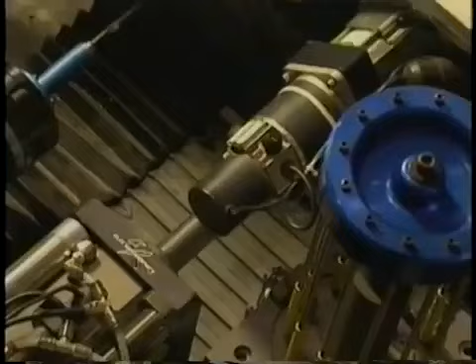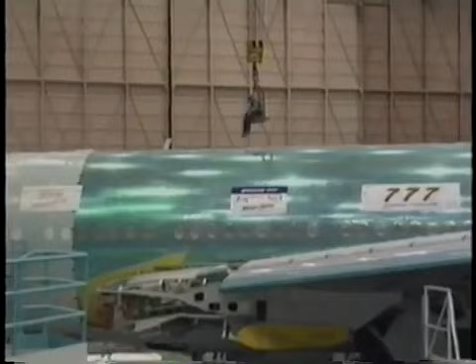It would be one of the most complex machines ever built. It would take 10,000 people and nearly 5 years to build it. It would cost an estimated $5 billion.

Success was anything but certain. The plane would contain more than 4 million parts supplied by contractors around the world. But would they arrive on time? Miss your first commitment and then things start to go wrong. And would they work? From a technical point of view, I would not put this back on the airplane if I had a choice.

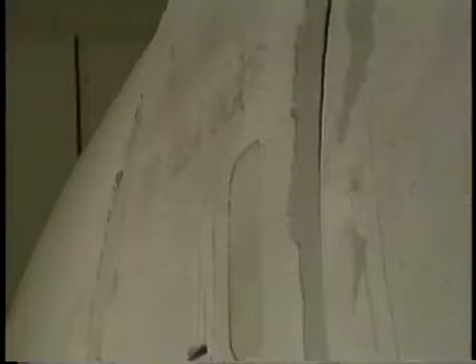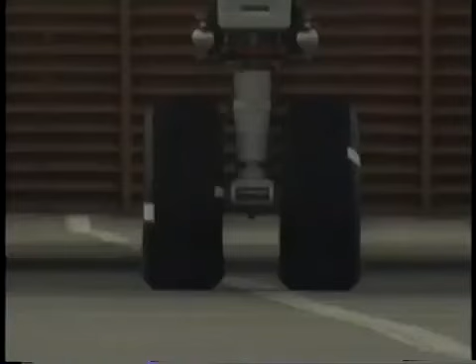This plane would be built to set a new standard for commercial aviation. This is the story of the building of a 21st century jet.

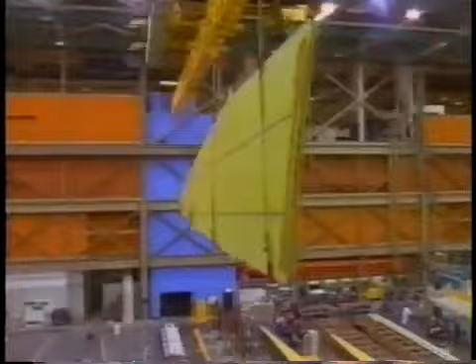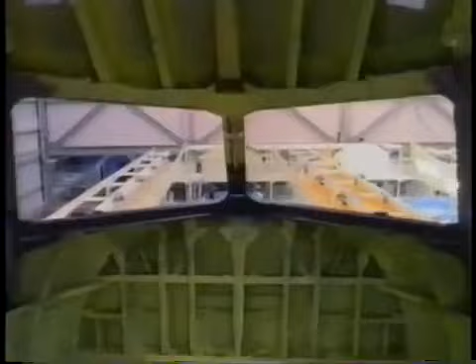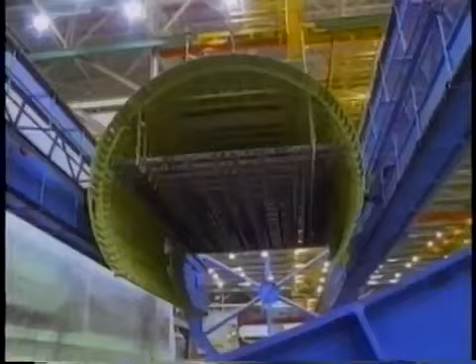For the last 3 years, we've been following the process of designing, manufacturing, and testing the world's largest and newest twin-engine airliner. It's cost an estimated $5 billion. Boeing needs to sell 200 or so planes at roughly $100 million apiece before the company will consider the plane a success.

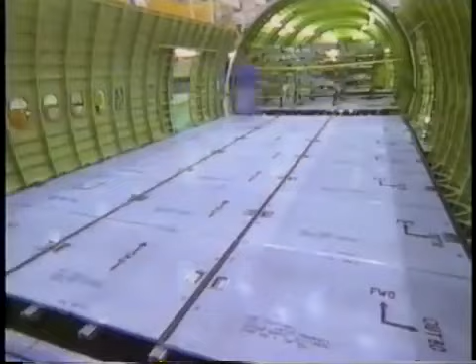Back in mid-1992, Boeing began assembling and training the 10,000-strong team whose excitement and disappointments would punctuate the complex process of plane making. A key figure in this drama was Alan Mulally, the 777 director of engineering. He had a boyish charisma, a fierce pride in his company, and he was determined that the new plane would succeed - the best airplane company in the world.

But in the time since Boeing had developed its last airliner, the aviation industry had changed. It had become harder to hold on to a share of the market. What's different with the airlines? They have choices. They haven't had so many choices before. All except the 747, Airbus has an airplane that can match every one of the Boeing airplanes. So they have choices for the first time in history.

This new competition had come about because of a gap that opened up in the commercial aviation market. The airlines wanted a long-range plane that was smaller than Boeing's 747, so Boeing's two rivals started manufacturing new planes to fill that gap - Airbus with its A330 and 340, and McDonnell Douglas with the MD-11 and 12. The 777 comes somewhere between a 767, a 200-seater, and a 747, which can carry up to 425 passengers. When the company first decided to enter the race, they hoped they could expand the 767 in ways that would satisfy their customers.

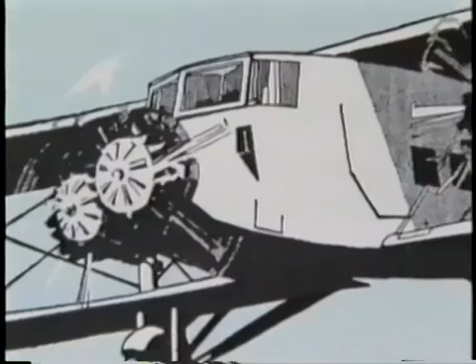To justify the huge investment in the new plane, Boeing needed a launch customer, an airline that would commit to buying a significant number of the new planes in advance.

They naturally turned to United Airlines. The two companies had been partners in the early days of commercial aviation. This is United's first Boeing airplane, the earliest all-metal transcontinental passenger airliner. The company has since bought more than 1,000 Boeing airplanes.

But the historical relationship between the two companies counted for little when it came time to make the deal. Gordon McKinzie of United: So we went through a rather large evaluation process in 1989 and 1990, where we were looking at 33 combinations of airplanes and engines for our wide-body purchase. And this was just one of the candidates.

The 777 was up against the Airbus and the McDonnell Douglas airplanes. The sales campaign came to a head on the weekend of October 13th, 1990, when all 3 manufacturers, Boeing, Airbus, and McDonnell Douglas, were summoned to United headquarters in Chicago to make their pitches.

Boeing was asked to sign this handwritten piece of paper. It played a crucial role in the decision, as Alan Mulally would later tell the 777 team.

There's a piece of paper that Jim Guyette, Executive Vice President of United Airlines, wrote at 2:15 in the morning. He woke up in a cold sweat. He's going to walk in and see Mr. Wolf, the chairman of the board of United. He had the chief financial officer who was voting for Airbus instead of Boeing, and he had to walk in and make his vote: what airplane should United Airlines go with for the next 30 years?

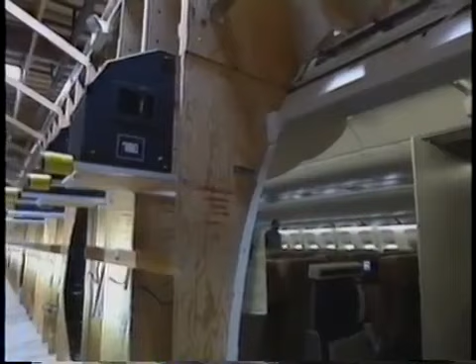But it was the interior of the plane that most interested the customer. To show off the interior layout, Boeing spent hundreds of thousands of dollars on a life-sized mock-up. It would be an essential sales tool. Early on, Lord King, chairman of British Airways, was given a guided tour.

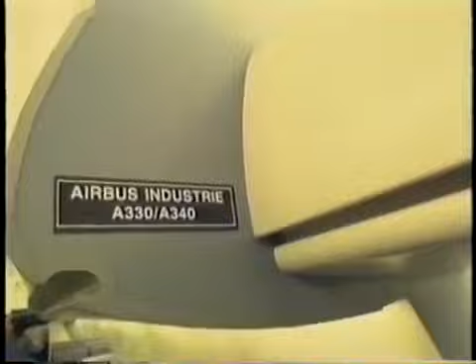Lord King is shown an important area at the back of the mock-up, called by salesmen the dirty pool, with an emphasis on how the 777 would compare with the competition. So all the wide bodies flying today, because what we were after was, you said make it bigger and make it roomier. Well, this is what people are used to flying. Here's the contour, and here's the bins. Here's the 777, the 5 inches larger. You can see the contour, and then the effect of the bin. Okay, all right, let's look at the back.

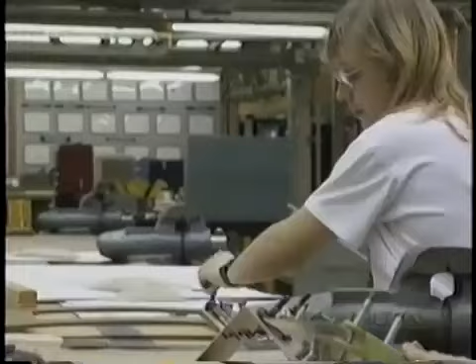In previous Boeing planes, full-scale mock-ups of the aircraft, inside and out, were not just marketing tools. They performed an important role in the design process. With the 747, for example, Boeing built several life-size mock-ups of the whole plane, with every part modeled in detail before the design was finalized. It was the only way the engineers could see whether or not the pieces fit together.

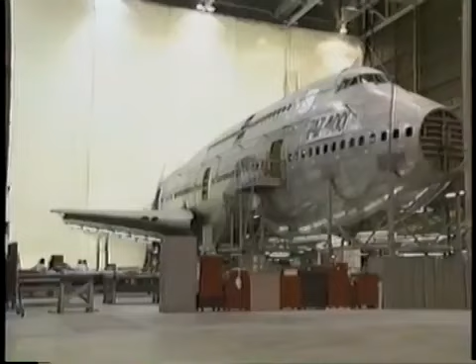Because of the three-dimensional complexity of the plane, a component as first designed often got in the way of the structure or one of the other parts, like these red pipes, which are not meant to go through the yellow duct. With the 777, Boeing wanted to find ways to catch these interferences, as they're called, before the assembly stage.

You have 5,000 engineers designing the airplane. It's very difficult for those engineers to coordinate with 2-dimensional pieces of paper. For a designer who's designing an air conditioning duct to walk over to somebody designing structure and say, here's my duct, how does it match up with your structure? And they've got 2-dimensional pictures, very difficult. So we ended up using the mock-up and, quite honestly, the final assembly line to finish up the integration. And it's very costly. You end up with an airplane that's very difficult to build. It all has to do with visualizing 3 dimensions on a 2-dimensional drawing board.

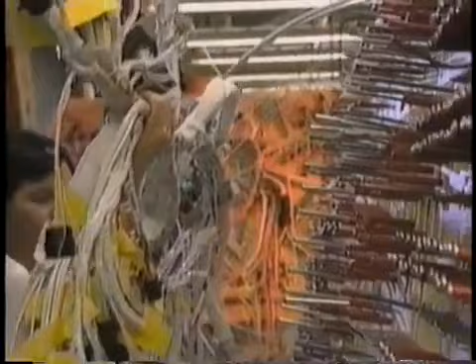One of the trickiest problems was working out the lengths and angles of tubes, pipes, and wires. We would literally, physically thread the systems through that mock-up, and then, in the wire bundle sense, take it out of the mock-up, flatten it on the board, measure it, and that's how we decided how long the wire needed to be. Then you would adjust as necessary, because the airplane, not made of plywood and aluminum, differs from the mock-up. So as you produce those first wire bundles, you make further adjustments to make them fit the real airplane. Hydraulic tube, a very similar situation.

The solution was a secret weapon called CATIA, a computerized design system that would require 8 mainframe computers to run it. Engineers would be able to roam the virtual interior of a plane that didn't yet exist.

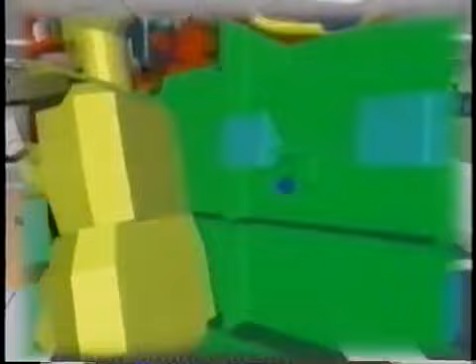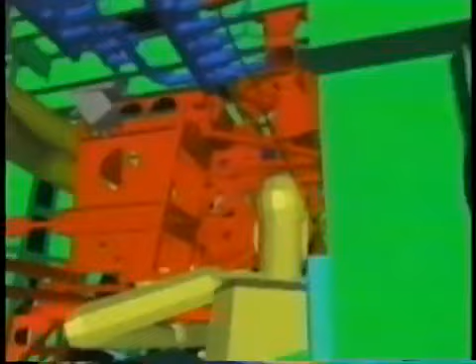As pieces were designed, they appeared in the virtual airplane next to other components, and the team could check to see that they all fit together before they were carved out of metal. So for the first time, the engineering creative process was enabled to think in terms of the way the world is, in terms of 3 dimensions.

Now, computers don't design airplanes. We have not put the knowledge that's in the airplane designer's head into artificial intelligence that balances all these objectives. Someday we'll probably continue to move toward that, but right now, the knowledge to design airplanes is in the designer's head. There would be more than 2,000 computer terminals so that each group of designers could feed their drawings into the main computers.

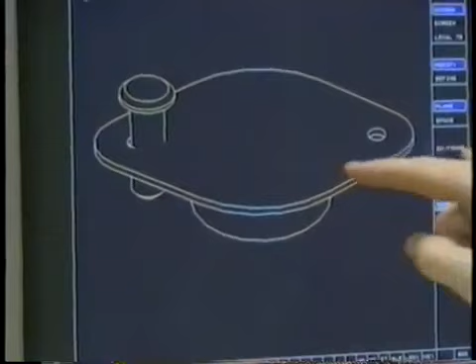In June 1992, the passenger doors team was checking for interferences in the components they had designed. An interference showed up in red. The designer was concerned about two crucial components in the door hinge.

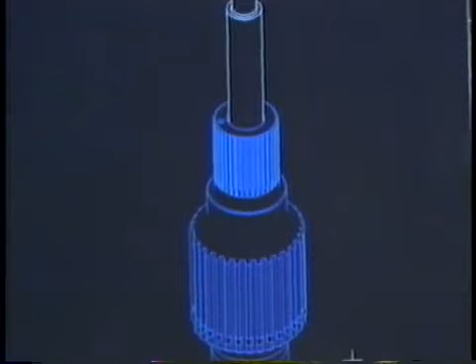This splined part right here, there's a bolt passing through it. It's actually the connection of the door to the door frame, the cutout. And this bolt affects that connection. Somewhere inside there we've broken some law.

Now that looks like a real interference. This is what happens when you accommodate your stress man's desire that they be intimate.

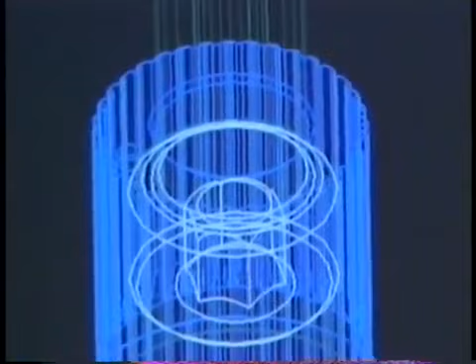Ah, they interfere for the entire head of that bolt. But the actual amount it interferes, we can really tell by cutting through the two of them and looking at an accurate cut, which doesn't take hardly any time at all.

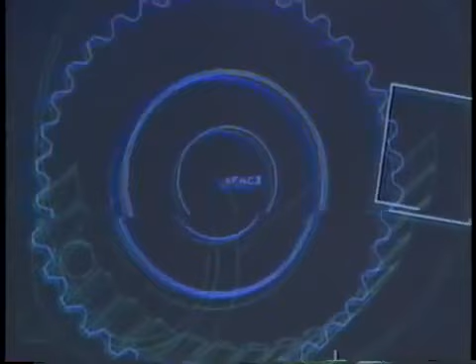Now this, yes, the second circle is just a little bit larger than the first circle, and I do indeed have a little problem here. But it's a very small one. We haven't released any drawings yet.

Another innovation on the 777 would be a new method of organizing the 10,000 or so people building the plane. On past projects, airplane design had been bedeviled by communication problems between the many different divisions in the company. For the 777, Boeing would create new work groups called Design Build Teams, or DBTs.

They would include people who had never before worked together. I wish I could say that design build teams were one of those wonderful ideas that just leapt forward, where you said, aha. In a lot of ways, it is a return to some things that have worked in the past.

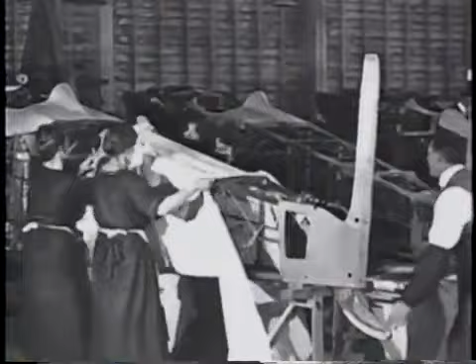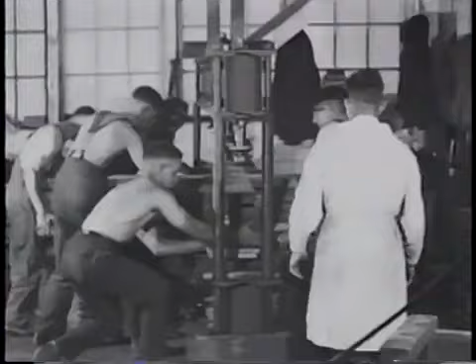That were scale driven. If you go back to the early airplanes that Boeing built, the factory was on the bottom floor, engineering was on the upper floor. Both manufacturing and engineering went back and forth. When there was a problem in the factory, the engineer went down and looked at it and said, well, you better do this. The entire design department was within 50 feet of each other.

As the scale went up, that got harder and harder and harder. And if you're not careful, organizations, just by the way they behave, want to form little enclaves. So structures goes off over here, and air conditioning goes off over there, manufacturing goes over here, and planning goes over there, and finance goes over there.

And then one day you turn around and you've discovered there's an us and them attitude. If only they would do this, then our job would be easier, and if only they would do that.

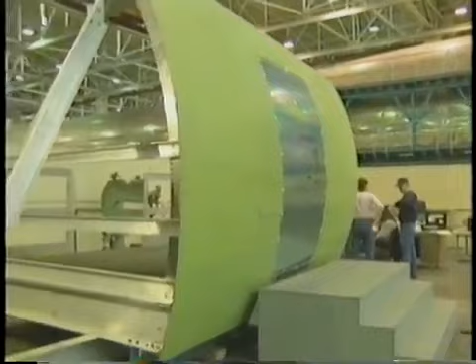The passenger doors were designed by one of over 200 design build teams, each responsible for a major component. Making an airplane door that works involves the complex interaction of geometry, materials, manufacturing, and in-service maintenance.

At one point, this team faced a problem that brought up all these factors. That's a full-size drawing of the two cutouts in the door skin that are located very closely together. Again, our principal concern is making sure that with all of the parts that have to be integrated into this area, and the fasteners that have to be put in the skin, do we have enough room to do all of that, and will the assembly be durable and damage tolerant?

The problem involved a metal area of the door skin between the window and the door handle cutout that was uncomfortably narrow. The designers had two questions: how strong a force would produce a crack in this area, and if the metal did crack, what force could enlarge it and lead to the door failing?

They get two different figures from the stress analysis engineers. It would take a force of 27,000 pounds per square inch to crack the metal. But once a crack had formed, a force of 12,000 pounds would be enough to open it up.

That's the way we perceive the situation. 12 is the upper limit at which the crack will not grow. And in this area, there's not much room for a crack to grow. We're very tight. I guess the problem, what's still not clear in my mind is, for the identical area under the identical consideration, are you getting a recommendation of 12 from one guy and 27 from another?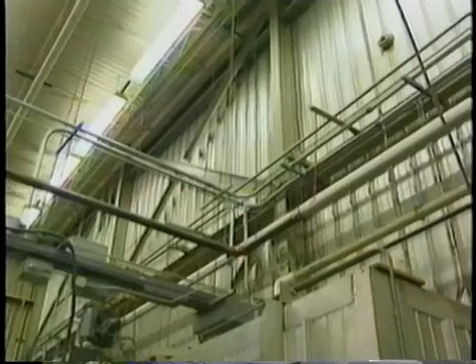In mid-1992, while the team was still designing the door, they built a prototype for a very important cold weather safety test. The engineers wanted to see if the door could be opened in the worst imaginable conditions of icing on the outside of the fuselage.

The first stage of the test involved spraying the door with water all night in a low-temperature chamber until there was a thick layer of ice.

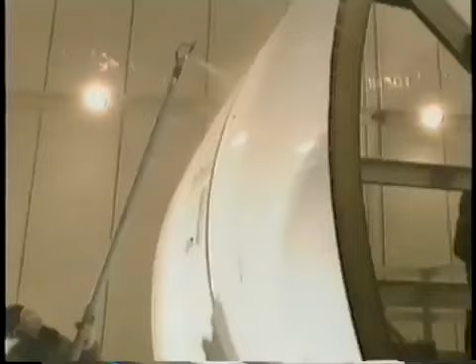But how could a plane ever get into such a state? If a plane lands from a cold flight, minus 65, and comes into an airport where it's about 28 degrees with freezing rain, that rain adheres to the outside of the airplane. We need to make sure that we can open the doors. Our criteria is a quarter inch thick of ice all over the whole airplane, and yet someone with nominal handle force on the inside can still open the door.

We consider the ice to be as strong as 100 pounds per square inch to break it. It's a quarter inch thick, with about 200 or so inches of ice around there. So factoring all that in with safety factors, it's about 6,000 pounds of lift that has to be put on the door to break all the ice, and that has to be put in with about 50 pounds of handle force on the inside. Set up as quick as we can.

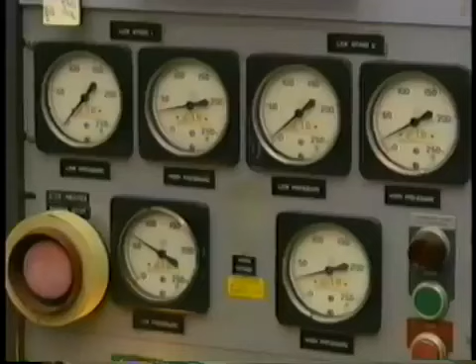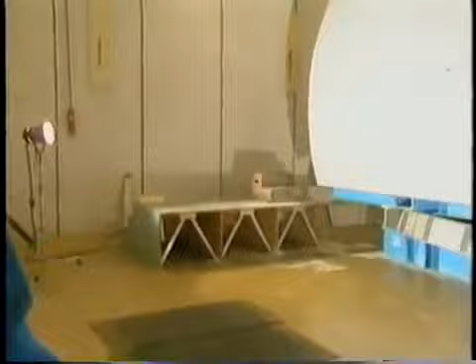The following morning, the door had acquired a thick enough layer of ice to test the mechanism. It's minus 20 in there right now. It was minus 55 in there yesterday when we sprayed the water to make sure it iced up. Considerably colder yesterday. Minus 20 is not so bad.

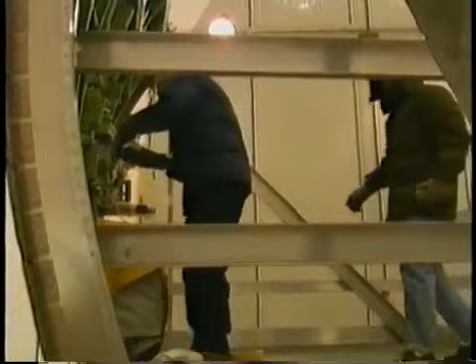This test had never been done before on this door design. If it didn't work, the engineers would have to redesign the complicated opening mechanism inside the door.

Now this is, the girth bar was right against here? Right, this is all fabric. That's great, it'll show up automatically. Boy, it's nice. This is a big key test, and it worked great. Feel real good about it. Right.

Another part of the plane that was being tested long before the 777 existed was the flight control system. Boeing equipped one of its smaller planes, this 757, with a prototype of a brand new system that would be used in the 777. They had to test it in flight. Right now I'm holding a lot of column force. These tests came after many months of testing in simulators on the ground. The new system was called fly-by-wire. I'll go to 10,000 feet and about 250 knots, and we'll stop there and do some evaluation.

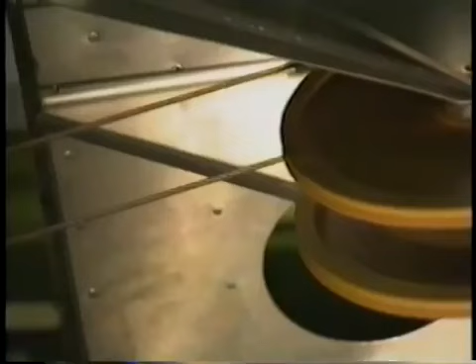Boeing's chief test pilot for the 777 was John Cashman. He would be the first to fly the plane once it was built. He quickly understood the advance that fly-by-wire represented over the more cumbersome system then in use. An airplane, particularly a large airplane, has large cables that run from the cockpit controls to the actuators that move the surfaces, and almost all big airplanes are hydraulically moving the controls. Those large cable runs are very difficult to rig and very time-consuming to maintain.

So from a maintenance side, it's a fairly big improvement in terms of time to maintain. The changes and improvements you can add to an airplane are much more easily done if it's a computer card change versus a mechanical redesign. There's a pilot's joke about fly-by-wire systems that says modern planes could be flown by a pilot and a dog - the dog to bite the pilot if he touches the controls, and the pilot to feed the dog.

In fact, the computer systems that would be installed in the 777 were so intelligent that engineers believed they could make decisions as good as those made by the pilot. But Boeing stopped short of letting computers fly the plane. It was a question of safety. The biggest disadvantage from a safety point of view is the potential that you haven't thought clearly through all of the events that may occur and taken enough precaution. There's an apprehension anytime you change technology, particularly when you switch from mechanical, which is visible, to electrical, which is not. So to some extent, we've taken a conservative approach to make the airplane fly like a conventional airplane from a pilot's point of view.

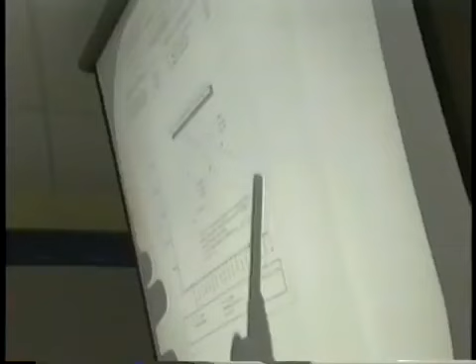New terminology came thick and fast at this stage of the project—too fast for some members of the team.

We do that, MCs are okay. Requirements for SDS items and APL, Raj, next week. I forgot what an SDS item is. It's a shop distribution standard. Okay.

We'll also show you the PRR process. With delivery schedules becoming critical, tempers began to flare when one engineer felt he was being delayed by another.

I've taken a lot of flack over that. Item 8 was the wrong one to put in. The thing we agreed to put in is when structures returns to the data set. No, my man told me. No, we all agreed—we all agreed, even showed him the chart. I showed you the chart. But I showed you that's useless data; most of it is obsolete.

Because it's not useless data. I'm missing releases because you did not transfer on the date the agreed to information. Because you didn't transfer to me. What baloney, anyways, that's the wrong date. No, it's not, I did it. I sat there for 5 minutes 2 weeks ago and explained it. I showed you an example. Everybody jumped on, why are you talking to me? I agree. You guys agreed? Yeah, it's done.

It's done. In spite of mounting pressures, there was the occasional good news. One of the team reported on a foreign airline whose government was deciding on the purchase of 6 777s. The 777 had been up against its main competitor, the Airbus A330. And the cabinet had approved the 6. And then they said, well, we think that may not be right, and what we think is we probably ought to add 2 more. So instead of approving 6, they approved 8. And then they also did not approve the 7 A330s that they were asked to approve. All right, nothing like winning.

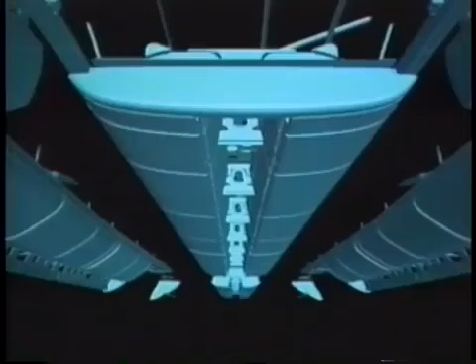Boeing was also proud of its new overhead bins, which seemed to demand a technology and a jargon all their own. We have 3 sizes of bins, and those bins can be shuffled to any arrangement to snug up to outboard monuments. We call them monuments, labs, closets, galleys, etc. But more importantly, in the past, each one of those monuments was very static and had to be tied straight back to structure. In this design, this fore and aft member allows that unit to be translated fore and aft in the cabin on 1-inch centers anywhere in the airplane in prescribed flex zones that allow load path capability in the overhead rail.

The Japanese were expected to be one of the largest purchasers of the 777, but would be among the shortest in stature. Nichols finds a diplomatic way to refer to this fact in describing the design process.

This is an issue with our customers, more so with our Pacific Rim customers than for instance European customers or the American carriers. It's the height, it's the ergonomics of the latch, and some of them feel that it's a bit too high. Now, on a pivot bin, it must be this high to reach the latch, but once it opens, then the access to the bin is more than acceptable and more than appropriate in terms of a shelf bin. Where the shelf bin remains static, you hit a latch that's quite low, and the door swings up, and now I'm reaching up here to grab the door. So the latch handle, though our customers have expressed some concern, they've all been through the mock-up, and they understand our design, and to physically move that would demand a lot of effort, and believe me, we can do anything, but we've pounded our stake in the ground and believe ergonomically and demographically this is the right latch.

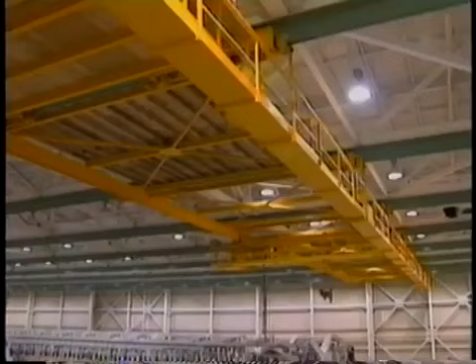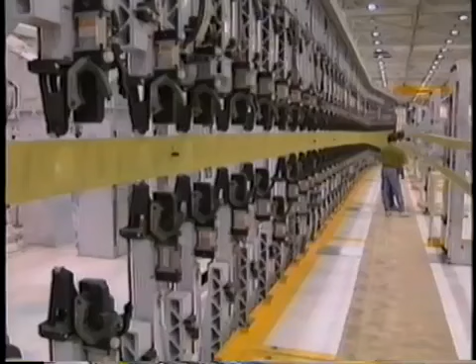The first year's work on the 777 involved designing the new plane. Now manufacturing would get underway. It would begin as the first component of Boeing's brand new aircraft, a wing spar, began assembly on a giant automated riveting tool. This piece was a long, thin metal spar that would run the full length of the wing. Over the next few months, the rest of the wing would be built up around it.

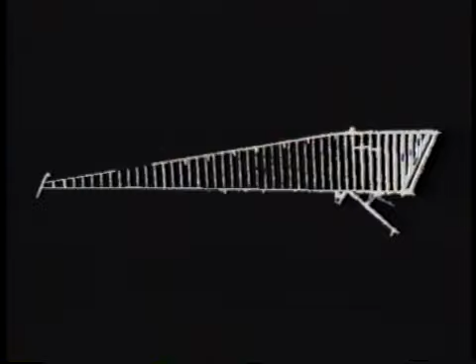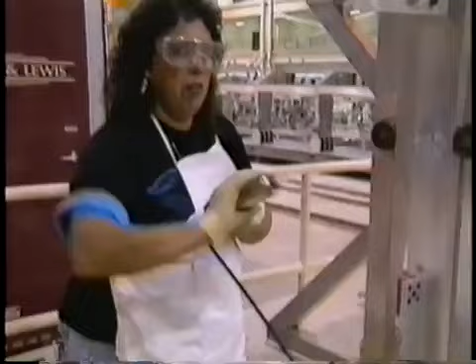Sylvia Lefferer had the informal honor of initiating the process as she began her job of sealing the edges of the 100-foot-long piece before it was fastened to other components. It was a simple process involving an injection gun and compressed air.

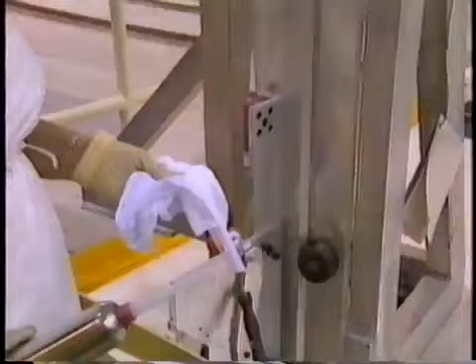Something's wrong. At least it was supposed to be. We got a problem, we got no air right now, so we got to try to get that hooked back up. Well, it did for a minute. Maybe it just bled out.

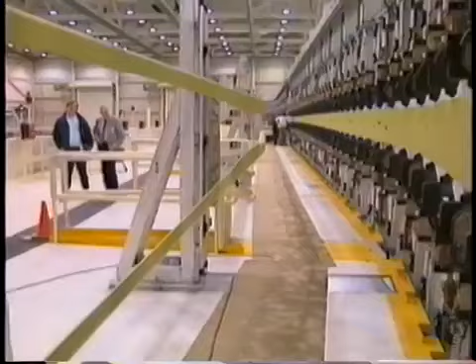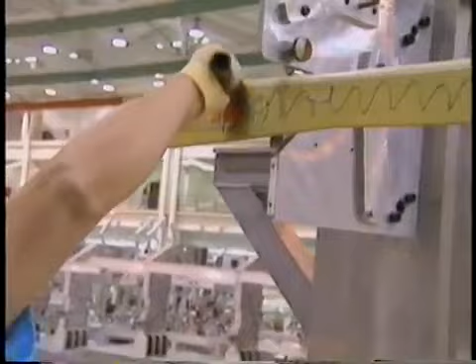Once the air started flowing, she smeared a layer of gray sealant along the piece. After years of doing this on other planes, she could produce a layer of constant thickness the entire length of the piece.

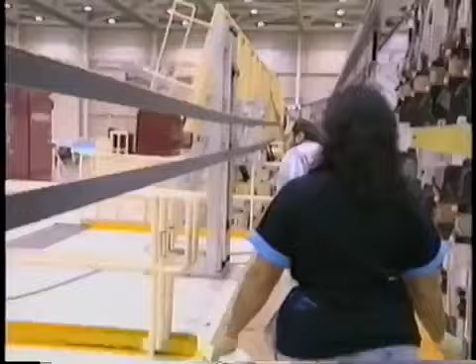The work had to be checked by a quality control inspector. Too thick a layer would add weight to the plane. Too thin and it wouldn't seal properly or prevent corrosion. Looks good. Thank you.

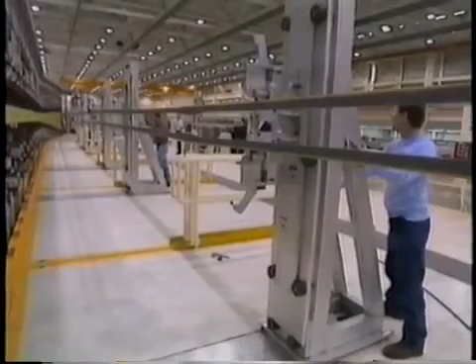Sylvia's work passed inspection and the pieces were moved into contact with another component ready for fastening.

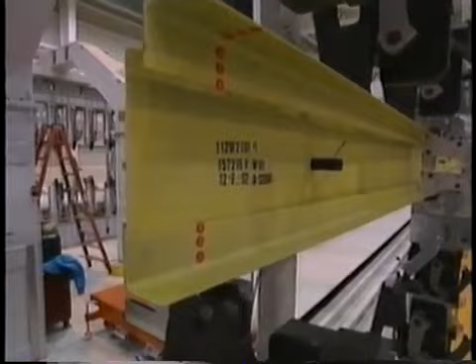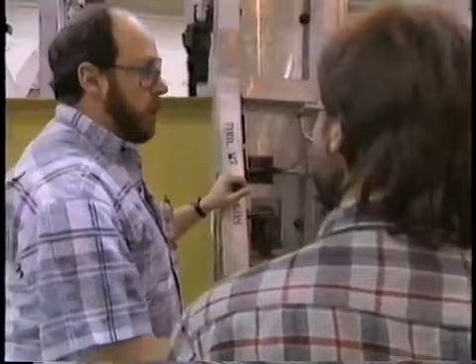Then there was another small problem. The upper piece of the spar was out of position by a 50th of an inch. The lower chord's at its locator inboard. The upper chord's 20 thou outboard of its locator.

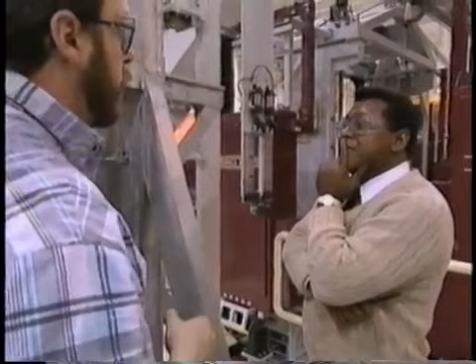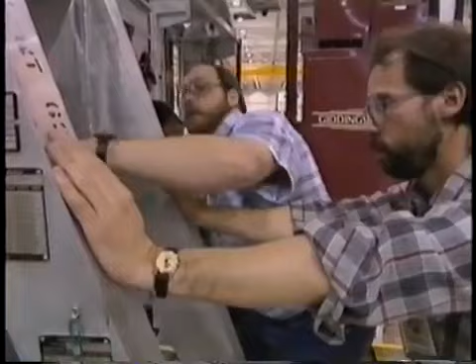You mean we just want to index up right there, right? That's correct. Couldn't we just take a big C-clamp and tap it in? You might as well use the provision of the tool, what it was built to do. Let's go ahead, to move this way? Yeah, okay, I want to see it. That's what this ratchet handle does here. See, you clamp this here, and then hopefully move this upper chord inboard. You ready? Ready? Okay, good. Now watch.

Over in the 777 team's brand new office building, Alan Mulally arrived for work. It was just a few days after Christmas. Mulally hadn't had much of a holiday, but he came in on all but 2 days. But it was kind of a nice time.

It was almost like a time to reflect on the past year and think about the priorities for '93. We had quite a few people working, especially in engineering and in operations and planning and tooling, where they were supporting the first parts of assembly. So I talked to quite a few of the structures engineers and the planners and the toolers associated with structure, just to get a feeling for how they saw it, what their problems were, and challenges and stuff.

Although the team had started assembling the wing, the design of the plane was not finished. The way we lay out the program is that we stretch that process over nearly 2 years. So what determines what parts are going to be designed is the sequence of when it's going to be assembled. So the actual designing of all these parts is spread over 2 years. So even though we're seeing parts being assembled for the front spar, those are the parts that were designed first, because those are the parts that need to be built first. But right now, all the payloads area, like all of the bins and the seat tracks and stuff, they're just being designed now because they'll go into the airplane later in the sequence.

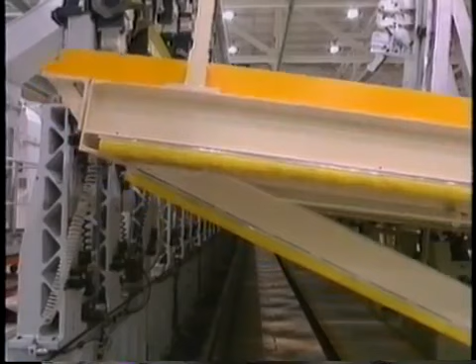The beginning of assembly was a significant milestone in the life of the 777. But now there were only 18 months till a piece of metal in this tool would fly, along with 4 million other components, on the airplane's first flight. And as Mullally looked ahead, he and his team faced an ongoing recession in the aviation industry. How would this affect the fortunes of Boeing's new plane?

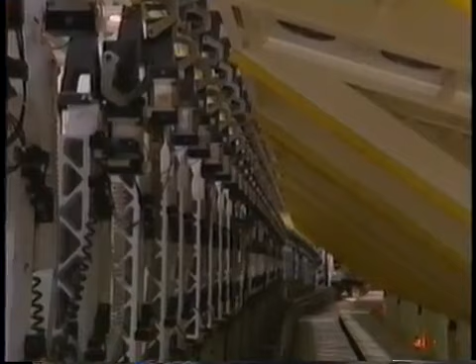It's so important for us that we absolutely not let the current events affect our intensity on getting this program done, because this is such a long-term business and these projects are big and made for the future, that we just can't let the anxiousness and the ambiguity of today's environment in any way slow us down. And so we talk about it openly. We talk about every cancellation, every airline that gets in trouble, every airline that has to go into Chapter 11 bankruptcy, and what it means to Boeing. And we talk about what's happening to Airbus the same way and what it means to us. It's okay, it's really important that we talk about it. And then we move on to what our real job is, and that is to stay focused on developing the airplane for the future. And that's our strength to keep going.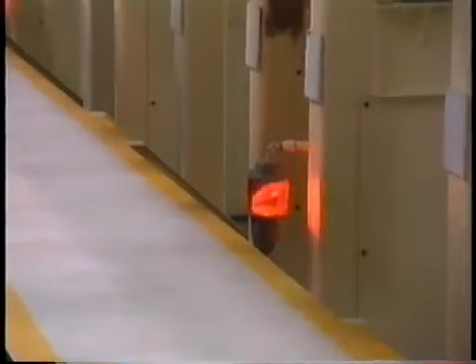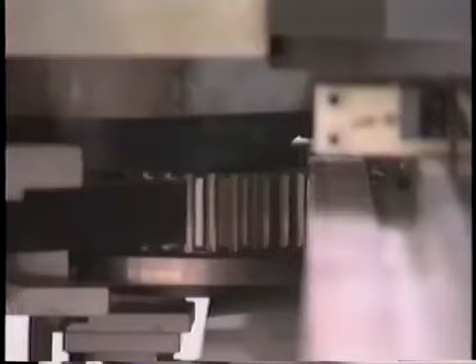But it is worrisome. The team's morale was at a low point. But there was no stopping the plane-making machine that had lumbered into action. They were committed to building the 777 whatever the challenges, and there were certain to be more of those in the months ahead.